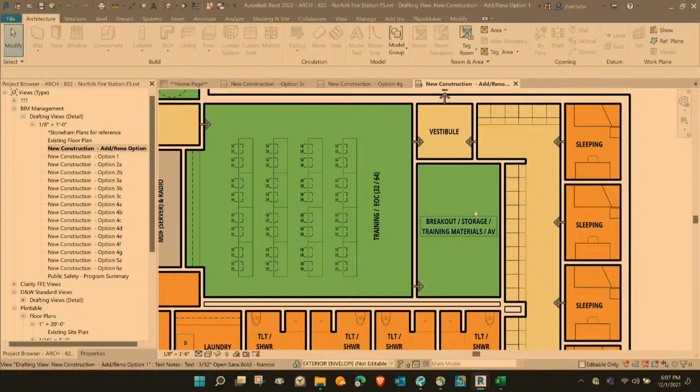Off the front door, you'd have a reconfigured lobby with a triage room, a couple bathrooms, and access to a training room used by the fire station and potentially also the public, with some breakout storage rooms. You'd also have adjacent access to all of the administrative spaces, with the living functions filling out the existing apparatus space. So the apparatus space would be converted to this training area and living quarters, with a kitchen, dining, day room, and a fitness room.

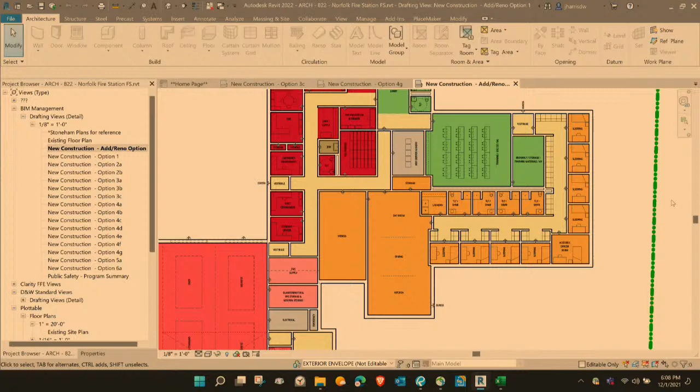Everything that would be operations related would be built new, adjacent to the existing station - that's everything you see back here, the apparatus bays and all of the support spaces. In addition, there'd be a small second floor area with a training mezzanine, mechanical space, and a training stair. So the overall square footage of this is just under 26,000.

One of the benefits here is that there's not a full second floor build out, so you do not have an elevator, a second stair, or horizontal circulation on a second floor. However, the downside is that when a call comes in, if staff is in the living quarters, they have a very long route to get from their spaces into the apparatus bay and operational spaces - potentially slowing them down even further than the existing trailer out back. So there are some downsides to that.

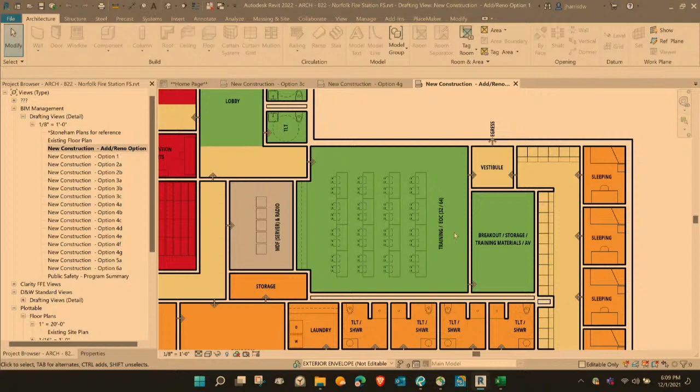The program does basically fit within that existing space plus the new addition. The training room is downsized a little bit from the program - the idea was to have a 40-person training room, and we were able to get in up to about 32 people. The rest of the program has been incorporated, though.

Any questions about the ad reno, just from a programmatic planning standpoint? I just had one general question - when I looked through the three options, this obviously had the smallest square footage. Is there program missing from this one that's in the other ones, or is it just a more efficient layout? Great question - it ended up not coming down to efficiency so much, but the lack of an elevator machine room, second stair, and horizontal circulation on the second floor. That was the big difference. One of the plans I'll show you today will actually be smaller in footprint than this building - we were able to optimize the efficiency to get it even smaller.

So this is the east-west version, and this shows a fully new construction building, and it's located so that it's fully set behind the existing building so that operations can continue during construction. So we would stay out of the way of the existing building.

Color-wise, everything is very similar. Green is public. Anything down here in pink is operation-related, and then on the second floor would be all of the administrative spaces.

Functionally, you have a lobby with direct access to a training room, just like in the ad reno version, but this is full size, so this meets the program capacity of 40 people rather than the reduced size.

One of the benefits here is it brings the triage room, the front lobby, directly adjacent to the apparatus bays. So when the public comes in, they can be brought in on tours, or if they need access for triage, they have that direct relationship to the apparatus bays.

You've got 4 full-length apparatus bays plus 2 shorter apparatus bays for some of the smaller vehicles, all of the support spaces in the back and along the side.

And then on the second floor, just to orient yourself, stair and elevator from the first floor come up here. Again, the street is along the front.

And you have the full admin suite on the second floor. So you've got an administrative assistant that would be the greeter on the second floor, with the chief and deputy chief directly adjacent to that, EMS, some of the other admin spaces, fire prevention.

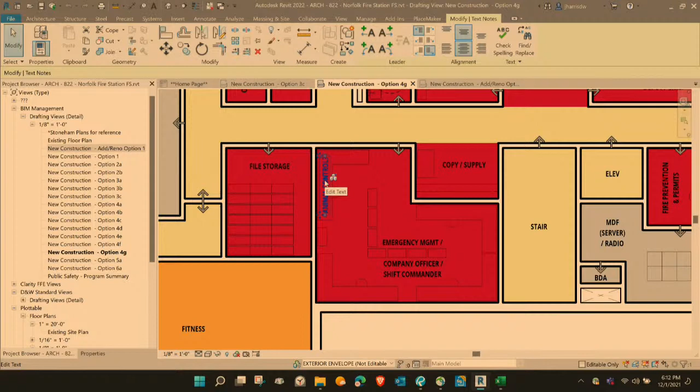And in this scenario, we were able to put together a larger joint office area that's open for EMS, emergency management, company officer, and shift commander.

And then we have the rest of the living spaces. So we have fitness, kitchen, dining, day room, and then all of the sleeping rooms along the rest of the space, with a large mechanical space in the middle, training mezzanine directly off the training stair, and that opens to the apparatus below, so they can put in ladders within the building, do some training right inside the building, which is really nice.

So the square footage on this option, we were able to get it down to 25,720, so even smaller than the ad reno version.

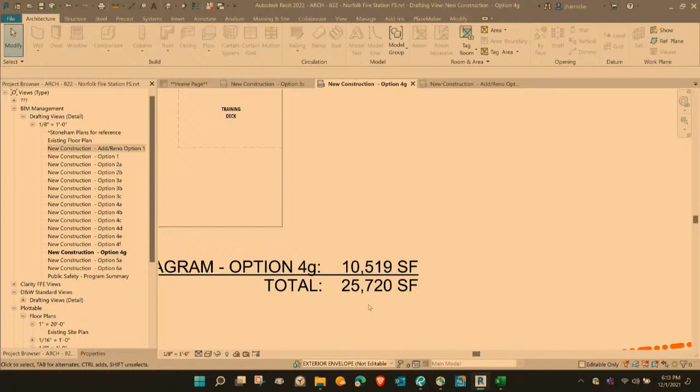Any questions on this one? I know I'm going through these pretty fast. Okay. Is there time to come back later and discuss them? Absolutely.

And the third option is a north-south orientation. This places the building adjacent to the existing fire station, but brings it all the way up towards the street, so you have a little bit closer street presence.

However, there are some negatives that go along with this plan. From a space efficiency standpoint, this one is less efficient, partially due to the shape. By angling the building in order to try to get some of the apparatus bays to have better access to the street, you have some less efficient spaces that you end up with in the middle.

This is a split plan, so you end up with some of the administration on the first floor, some of it on the second floor, and training room on the second floor as well, along with the living spaces. Programmatically, all the same spaces are here, but they're just divided up a little bit differently.

The other downside to this is, from a site layout standpoint, the public who would come and access this building would likely end up having to park right out front here towards the street. We think we can maybe get in about 10 public parking spaces there.

Yeah, that's a great question. So early on we had talked about it, and from an operational standpoint, having the apparatus bays all face away from the street was a little more problematic, partially visually for the town to be able to see the apparatus bays, but also just getting out of the bays and making that turn is a little more difficult. So from the department standpoint, it was preferred to try to angle these closer to the street.

Unfortunately, fire apparatus really aren't getting much smaller. So you don't want to make a 90-degree turn? Yeah, and I actually drew on some experience I had previously. We had a station in Tennessee that was built with that orientation where the bays didn't face the street, and our tower ladder chewed up the tires in less than a year. We had to replace all of the rear tires. Because that turn, even on a nice concrete pad, it just chewed up the tires. So even though we tried to rotate it away, it ended up creating that issue for us.

Any thoughts or comments on any of the three? So Chief, maybe you want to talk a little bit about which one you prefer? I don't know if that would help everybody, because they've been working on this really hard in terms of getting the layouts right.

Yeah, I think the work group meetings have been really good, very insightful. We've had a lot of opinions and also desires and wants, but also focusing on the needs. And I think having the expertise of the architects and our OPM, with their previous experiences, has helped highlight things that help reduce cost, in terms of tightening up the building envelope, tightening up example, the roof spaces and things.

We really, after conferring with the staff, prefer this version here, the east-west orientation with the bays facing out to the street, and also having that community room / training room on the first floor, and all administrative and basically all of the operations and living space of the department upstairs.

We did discuss some of the potential challenges or drawbacks to having all of the administration upstairs or all of the operation upstairs, as well as the potential pros, because we felt like the training room was an important piece of what we need in the program, but also wanted that space to be available because there's a shortage of spaces in town for meetings such as this or other civic organizations.

We wanted to embrace the fact that this is a community building and it is the town's building, and have accessibility for that training room to be used for other town departments. We met with the police chief yesterday, and it's something they would be looking to take advantage of for certain in-service training and classes.

So in doing that, we isolate that public area from the areas that need to stay secure or where we don't need people kind of trouncing through, and it grants some accessibility into the building.

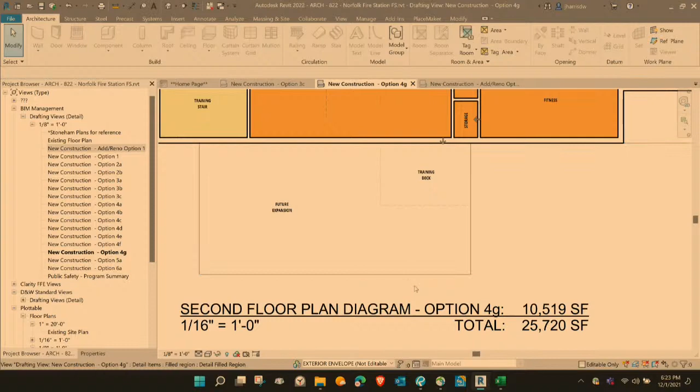There's almost no space left really on the site. One thing I did find interesting though on the north-south one was that there was some future expansion area. I guess one question I had for this one, okay, so it looks like something's been added now. I was asking where that might be accommodated in this option. So is that over a structure already being built? Correct. Okay, so it'd be a second floor on top of that. So this would be built to be able to support the second floor. Yep.

I guess I have a couple thoughts from a larger town planning perspective. Maybe I'll skip the detailed thoughts, but first thought is we are in the business district, so the design review board will have a say on what goes on here. Just talking out loud, it might be interesting to get them in sooner rather than later.

Some of the things we commonly talk about with projects in town are not presenting, granted maybe it's residential, not presenting the garage as the primary focus of the building. Maybe you can make your case that in the case of a fire station, it really is the primary face of the building, so maybe that's, people running out need to get on something. Yeah, maybe that's moot in this case, but I guess where I'm going with that is the fact that the main entrance sort of recedes from the street isn't what I would say welcoming to the community.

And to me, this looks a little bit like a block diagram that hasn't quite found its architectural form yet, right? You're absolutely right. This is diagrammatic at this stage for feasibility.

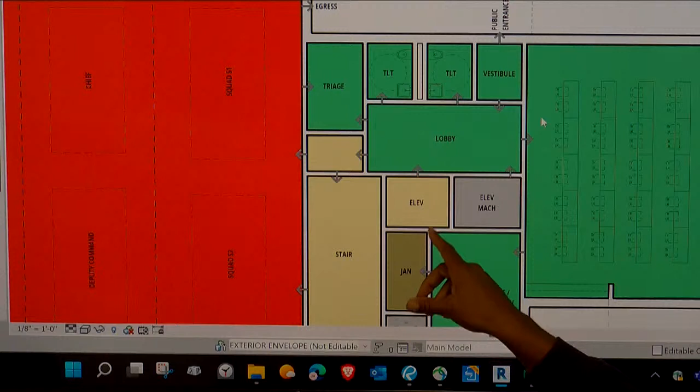And if there's a public event, for example after business hours, and even during normal business hours, the stairs and the elevator aren't accessible without being either buzzed in or escorted by someone from the department.

So I think in some ways it makes us more intentional about greeting the public, because right now sometimes during non-business hours or business hours we leave a door chocked if we know somebody's coming, and when we hear the buzzer we just wave them in. There's not really an interaction. So I think in some ways it's probably better for us.

I know it's more secure. That's one of my biggest fears about the way things are now, is that it's not necessarily the most secure site, especially for the amount of capital investments that are housed in the building. It's not the most secure.

So can we flip to the other option? Option 3?

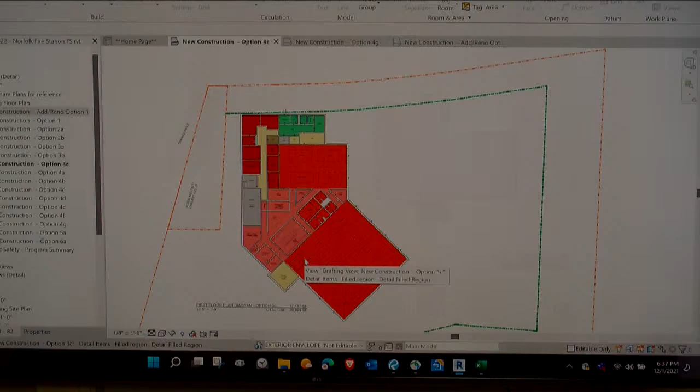Could we solve some of the inefficiency issues by rotating it even further? Take the apparatus bay and rotate it another 30 degrees north? So part of the problem is the existing building here.

Keeping out of the way of that for construction. Rotate it and slide it back? Yeah, potentially, right, and pull this away from the street a little bit more. But what we found is the more you pull this away...

Sorry to interrupt. I'm not thinking of keeping the same shape. I'm literally just talking about rotating the apparatus bay, reorganizing the spaces in pink, and maybe even creating some sort of a courtyard for the staff to use, like an exterior space for the staff.

Okay, so more of an L shape? Yeah, I guess, right, with some exterior space. It wouldn't all be interior. I mean, I recognize making an L would be much larger, but the elbow of the L could be negative space rather than positive, additive space.

It's certainly something we can look at. I don't know what that does functionally with the cars. I mean, you now have your smaller cars coming out at your larger trucks. I don't know if that's an issue.

Coordination, yeah. Don't want everybody pulling out at the same time, running into each other.

Well, and part of it is also vertical circulation, right? Making sure there's enough connection that someone can come down a stair here or down a pole and have direct access to those apparatus bays. So the further apart you pull those, the more problematic that vertical circulation becomes between them. And so maybe it's adding another stair or something like that to offset that.

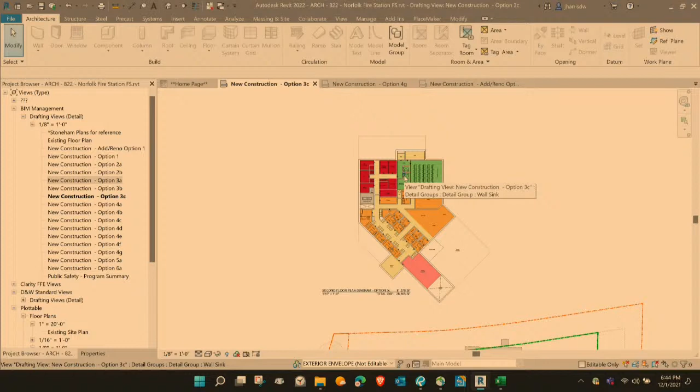Because here we're trying to make this plan do something it wasn't designed to do. I wouldn't be arguing to make this plan do that. I'd be arguing the apparatus bay should be its own volume, and everything else should go in a different volume, something like this.

But then where do you put, above all that right now is the living space and some of the admin space, so where do you put those if you don't put them there? Above the pink? So, to completely understand, I think what is being suggested is if you built the apparatus bays just as the apparatus bays, a block of building, and then everything else as a separate block.

And we can certainly look at that, but we can guarantee it'll add square footage, because you're not getting those spatial efficiencies that we're talking about.

And when you look at the addition reno, can you bring that up for a second? When you look at the addition reno, that's exactly what you're talking about, right? So we've got the apparatus bays, all there in red and pink, as its own volume, and then the existing building as its own. And what you end up with is a lot more travel distance horizontally to get from point A to point B.

So there's no second floor, right, there's no second floor. So you could take this, chop off the quarters wing and put it on top of the admin wing. Well, here, but that's the existing building. You make it new, right, so for the sake of conversation, if we...

So you could do the exact opposite, right? Push your apparatus bay down the page and to the right. Take your admin building, turn it 90 degrees and push it all the way to the left, and put the sleeping quarters on top of the admin.

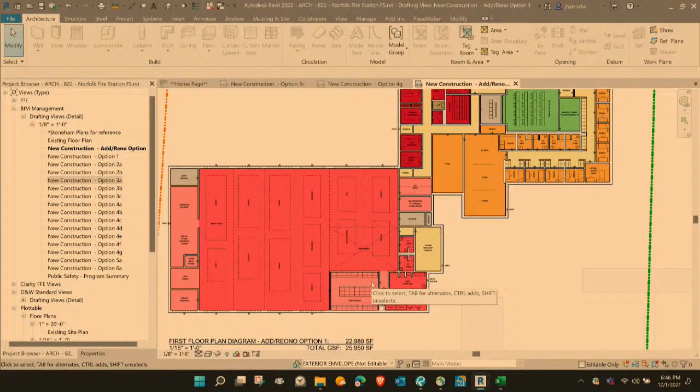So in the stacked versions of the existing, we're actually putting a lot of that, either the admin space or the dorm space, over those support spaces as well. And I don't want you to think there's going to be 12 feet of nothing, because we've got lots of mechanical systems that we're trying to keep off the roof, and that makes a good place to hang those pieces of equipment and put all that ductwork.

So I understand what you're saying about the volume, but what we try to do is maximize every cubic foot of volume within these buildings. As we go through the design development of this, that's where we start to get into where can we put this and where can we put that. And it makes a lot of sense to be hanging a lot of this equipment above the ceilings rather than build mechanical or additional mechanical space.

It doesn't become what's most cost effective. I mean, I agree with you, having space that's unnecessarily high just because it seems like not a good idea, but by the same token, if the whole square footage gets bigger and it costs you more, was that a better outcome? I don't know that it would be.

At that point, you're arguing volume, right? Yeah, I mean, oftentimes putting a pure cost per square foot on a building doesn't make sense if it's got double high bays everywhere, right? So the cost per square foot of the high bay area would be different than the cost per square foot of the non-high bay area, because you're putting twice as much stuff into it. Correct. Right, so there would be a trade-off there, but you've got to do this a lot more than I do.

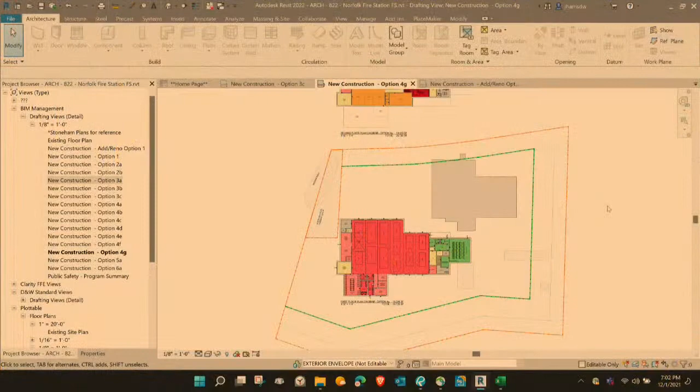I kind of wonder, if we have the 3 or 4 main vehicle bays, then have the public area, similar to the other orientation. So what I'm saying is if we move the green towards where the short bays are, and orient the short bays to come out 90 degrees to the right to use the existing parking lot, that may allow us to set the public space forward a bit more, still have the vehicles without 8 bays worth of garages directly facing the street, and not give us a weird orientation of triangular spaces to use.

I don't know if that's been looked at. It hasn't. One of the reasons, and it's a good thought, is by separating the apparatus bays, you run into a decontamination issue of keeping a clean zone and a dirty zone. You'd almost have to have two separate decontamination zones, one for each set of apparatus bays, so you're doubling the functions there.

Otherwise, you're potentially going through dirty gear through that public space to get to the decontamination on the other side. But you could set that public space in front of the right-orientation bays and put the decon zone in between the two sets, so you'd still only need one decon zone shared by both sets of bays.

And it's not going to be as critical, especially with ambulances and brush trucks, since neither requires formal decon on a regular basis. The cancer policies don't apply to brush fire stuff. And with the ambulances, although they're used at fires, I'm assuming, based on the staffing, that if a fire call comes in those staff will rotate to an engine.

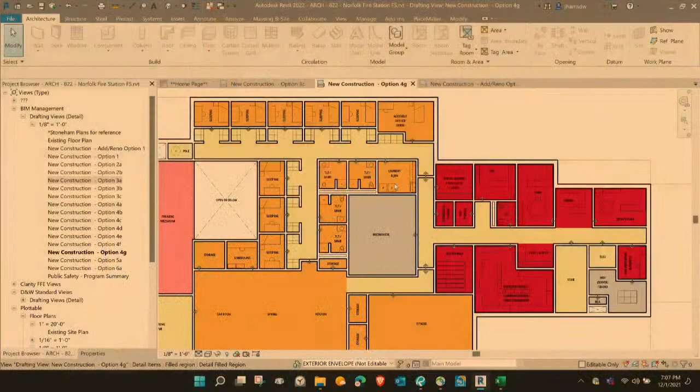And then on the first floor—sorry to keep jumping around. Is it possible to orient the elevator towards the staircase so there's no temptation from the public when they come in, so they won't even think they have access to the upper areas? Or is that too much of a hassle with the way the stairs are oriented and getting furnishings in and out?

We can certainly look at moving things around. Yeah, we could swap the elevator machine room. We can look at it. This was an attempt to get rid of as much circulation as possible, to keep this compact, but that's a possibility.

Can you do a machine roomless elevator with the hydraulics? Not in Massachusetts. By code, you have to have a machine room in Massachusetts. Well, I can think of a whole bunch of buildings that don't have them, so do they get a permit or exemption, or how does that work? I don't know, the current elevator code in Massachusetts says you have to have an elevator machine room, even if you do a

machine roomless type elevator. But that could just be a computer, like at the watch desk. It has to be in a separate room, our understanding from the code. The elevator code changes almost seemingly every year. I can think of probably 10 addresses right now in the city that have machine roomless elevators, probably previous. But I don't know if that works with hydraulics or if it's only the cable elevators. I think it's just cable.

Right, so the belted elevators have a rather large panel. It used to be that you could put the panel in the shaft. Then it was, you had to put the panel on a wall next to the shaft. And now you have to put the panel in a room. So I think when the machine roomless elevators came out, not everybody had a grasp on what that meant. And as time goes on, some of the inspectors have reverted back to just saying give us a room. We don't want to go in the shaft, we don't want to go here, we don't want to go there, just give us a room.

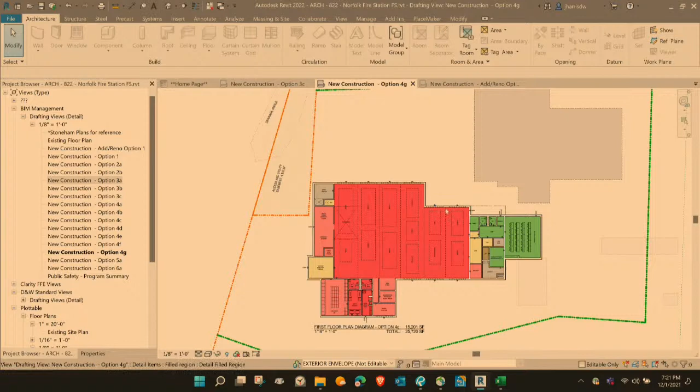The big limiting factor here is this, and how far we can go. We'll see how far we can push up the public areas. Right now, we're probably even closer than we should be. You really want a good 20 feet, because once you start digging out at foundations, you're getting even closer, and you need to be able for the contractor to work. So I think we're only 15 right now.

So we've had a lot of discussion about that, and in talking to some of the area chiefs where we toured, Sharon in particular and Walpole, both felt like it was a total and complete waste of money for the way our towns have to operate, because nobody's ever in it.

So it ends up being however many square feet and however much investment in infrastructure, in essence, wasted. Originally I had house watch in the plan, and one of the first plans had it, and the traditional part of me was like, no, we have to have a house watch. After looking at that and talking to those chiefs, they were like, listen, there's no reason for us to have it, it's literally wasted space.

Because I hear what you're saying, it's that piece where, hey, somebody should be here. But really, the way we operate, we're only at 4 people a shift, we don't have the luxury of having anybody available to sit in that space ever.

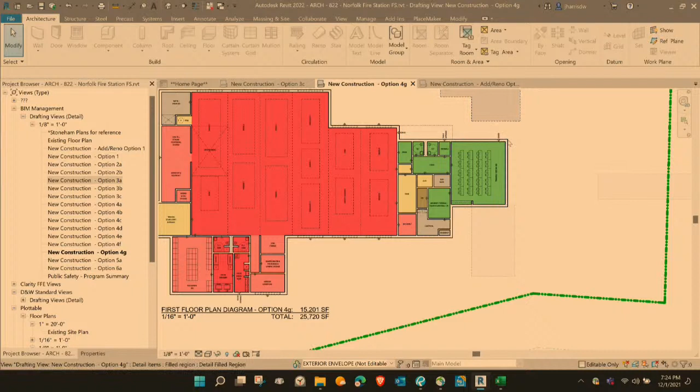Where would we go? This green area here, this back area, and all of this pink - that's actually only one story with sloped roofs over it, a flat roof here, and then we do have this overhang for the piece.

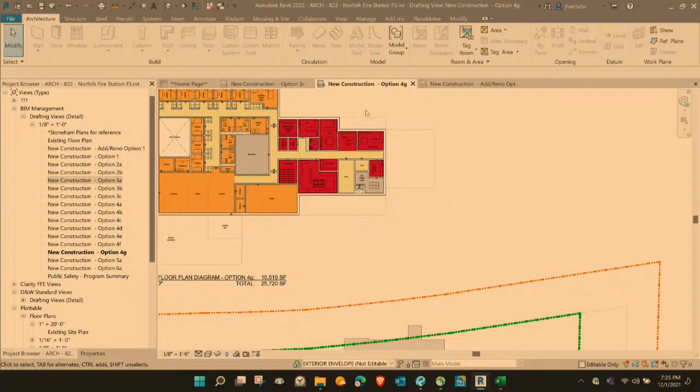What we're suggesting is, if you're okay with this scheme, we can come up with a couple different iterations as we continue forward, so we can explore concepts of how to bring the scale down, which I think we've been thinking about, but it's not coming through in what we're doing. How do you bring that scale down, and how is the building best organized? Because the next thing we want to talk about after you make a decision about the plans is the budget.

You'll see why the chief has been talking about our drive for at least the last 6 weeks being all about function and money. Because we're architects, we're going to make it beautiful. When this thing is done, people are going to look at this from the street and go, wow, it's beautiful. But right now it's all about the function, the layout, and the size - the square footage - because that's affecting the budget.

Even before we discussed this more in depth tonight, regarding the square footage reduction of the east-west orientation, I preferred the east-west orientation to the north-south. It seemed cleaner to me, a little more linear. That might be the engineering side speaking, but it seemed more compact and cleaner. I don't know if this will really be usable, but it did seem to leave a little more space on the site during construction, which might help phasing or construction staging and make the construction cost a little more efficient.